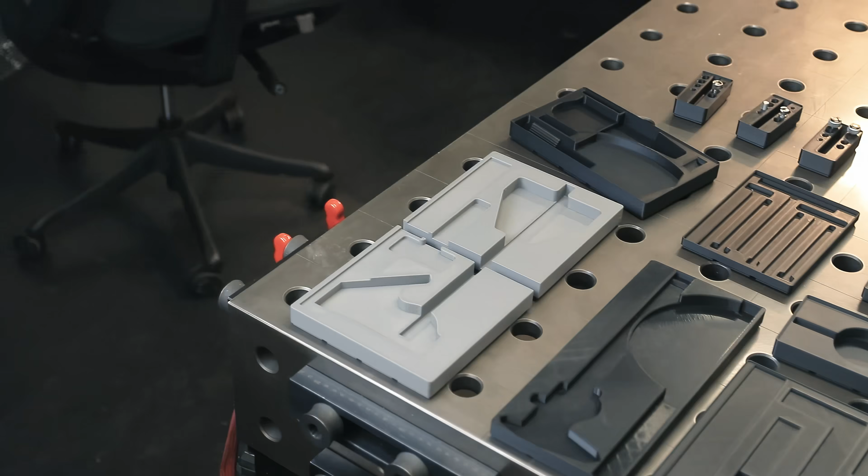Hey, welcome back. Today I'm going to show you how I organized my tool drawers by 3D printing tons of these organizers that are based on the Gridfinity system, so let's jump right in.

This might be surprising to a lot of you, but my favorite object in this entire workshop isn't a tool or machine, it's this tool cabinet. This thing is all steel and weighs over 300 kilograms empty, and it's made by a company called Lista, who make about the highest quality functional furniture out there.

Normally these things cost an absolute fortune, but some years ago I got incredibly lucky and was able to score this used for a really good price, and being used really makes no difference because these things will last you a lifetime. I love the layout of this because it has these gigantic flat drawers that are perfect for storing a huge amount of tools while wasting as little space as possible.

So almost all of my smaller tools live in this cabinet. The drawers on this are rated to carry up to 120 kilograms each, which is insane, and that's why a lot of places also use these to store materials.

You can get a ton of accessories for these cabinets to organize the stuff within them, and for a lot of things I'm using those, but the topic of this video is custom storage, so let's get to the point. One thing that the storage solutions that come with these cabinets don't work well for is my measuring drawer.

I've got a lot of stuff in here that doesn't really fit into any ready-made compartments, and while it looks somewhat organized, nothing really has a fixed place, and the bigger issue is that when closing the drawers, things tend to slide around and bump into each other, which is something you want to avoid with measuring tools like these. So I figured I'd take some time to come up with a solution for this.

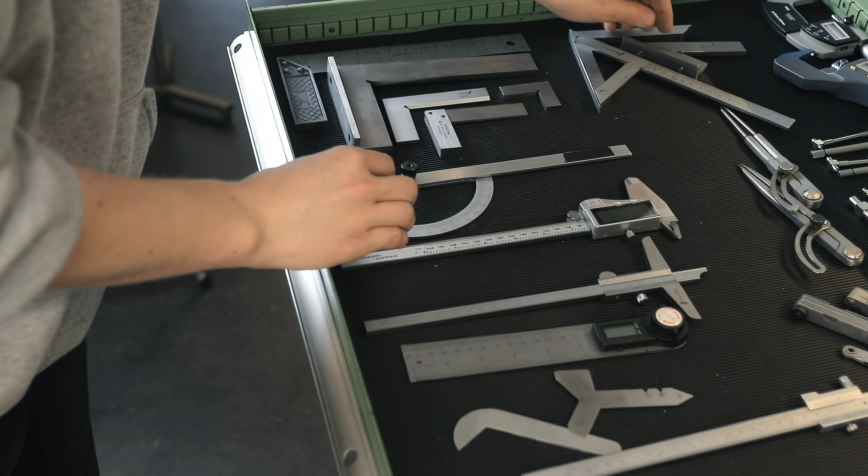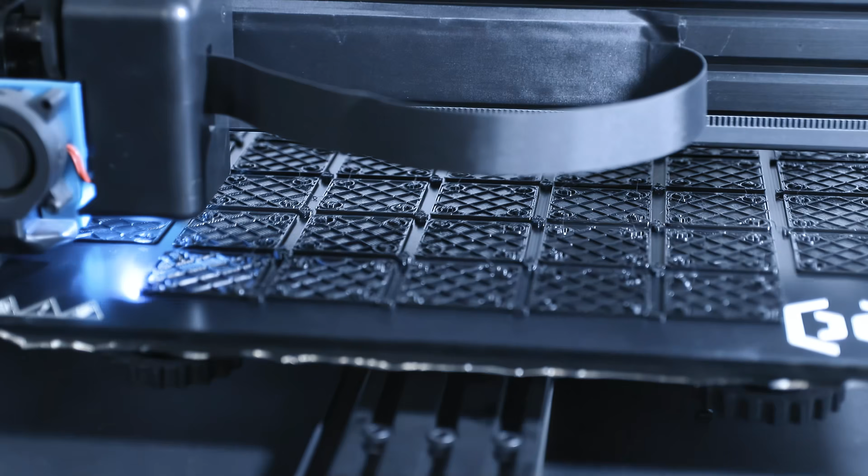If you watched my recent videos, you know I've been playing around with Gridfinity a lot, which is perfect for this application. Gridfinity is basically just an open source framework for making organizing systems, all based around a grid system that you can print yourself and then either use existing models, like these basic bins here that fit into the system, or make your own custom ones, which is what we're going to do today.

While we're at it, another drawer I want to tackle is the top one, which mostly contains a big socket set and various other bits and adapters. Storing this inside the case it came in works okay.

I'm not a big fan of these blow molded cases. They work okay if you're actually moving around with your tools, but since this always stays in the same place, plucking these tools out of their molds and putting them back in is pretty inconvenient, and this thing is also not very space efficient, so I want to fix that by making custom organizers for this one as well.

So next I'm going to show you the process of how I actually designed and made all these things, and show you some different workflows.

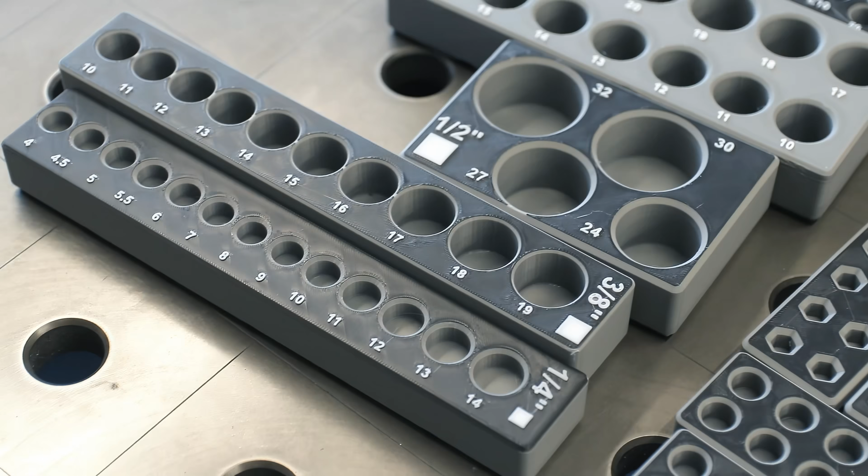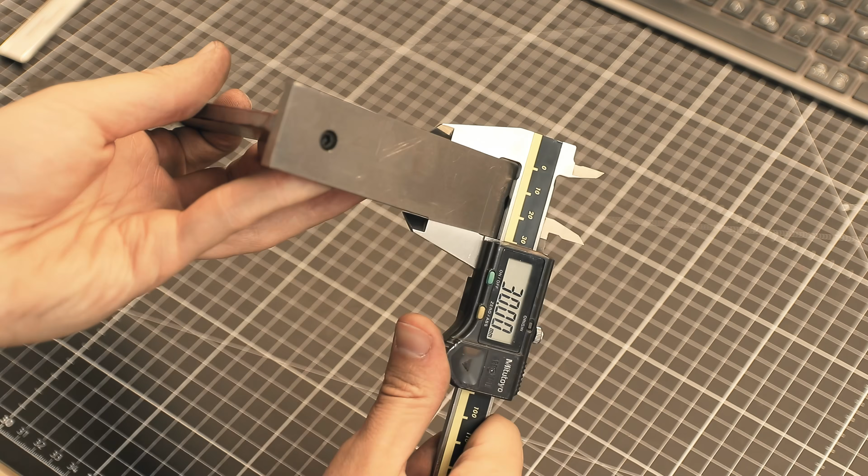There's different ways of how you can model the molds, and it depends a little bit on the shape of the tool, so I'm going to start with a fairly basic one like this square here. For something like this, the easiest way is to just measure the basic dimensions and write them down. Since this is a very simple geometric shape, this should be easy to build in CAD even for a beginner.

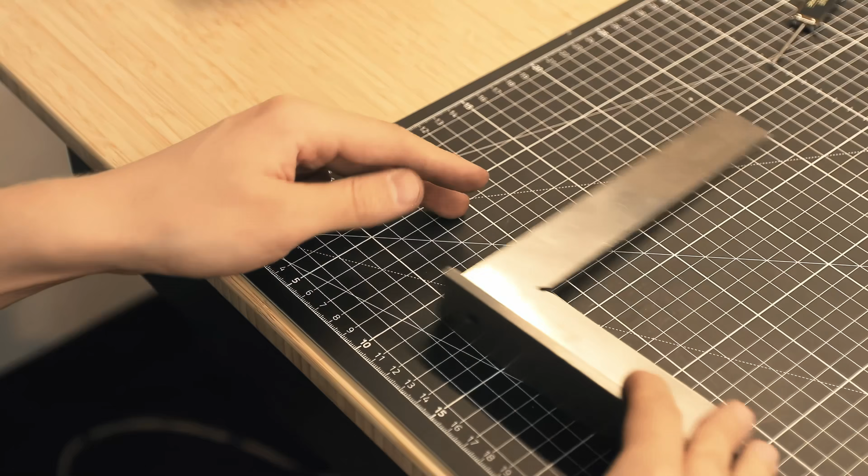Once you know the overall size of the object, it's now time to translate that into a Gridfinity grid. In this case, the object is about 205 by 130 millimeters long, so all you're going to do is divide the length and width by 42, which is the standard grid size, and then round up that number. For example, the length comes out to 4.88 grid units, so we can round that up to 5. Doing the same with the width, we now know that the container for this needs to be at least 4 by 5 units.

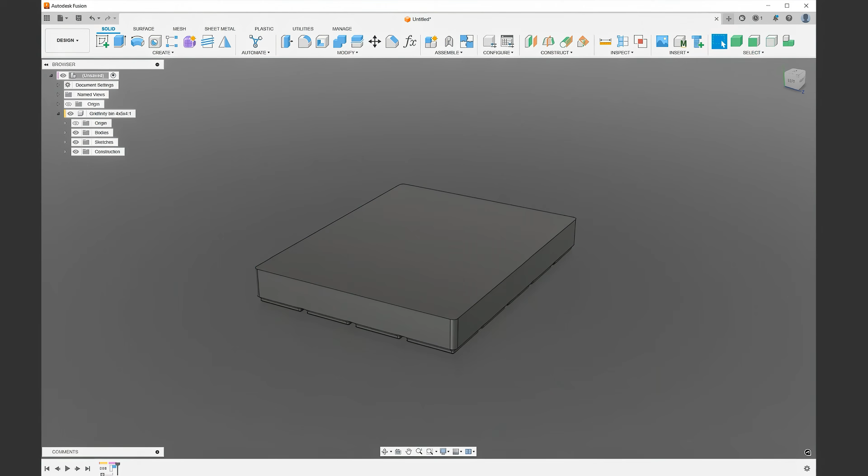So next let's jump into CAD to actually create that container. I'm using Autodesk Fusion, but you can generally create these assets in pretty much any CAD software. Fusion just happens to be the most convenient right now because people have already created some tools to make this as easy as possible.

One option is using the template from Zack, which you can find under his Gridfinity introduction video that I'm going to link in the description. This is basically just a Fusion file that contains a dummy Gridfinity box and grid, and it has variables set up that you can change to make it any size you want.

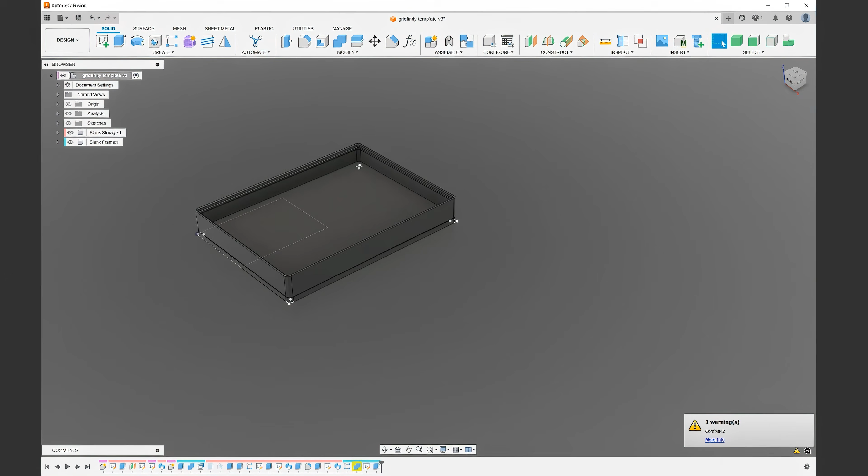That being said, if you want to make more specific changes to the model, you'd have to go into the timeline to deactivate or change some features. But there's an even easier way of doing this, using the Gridfinity generator plugin you can find on the Autodesk App Store. You can download this plugin for free, and it's super easy to install into Fusion. Once you've done that, you'll find a new button that lets you open up this menu.

This allows you to not only create a blank Gridfinity block any size you want, but there are also tons of additional settings, and you can even use this to make bins with custom divisions already built into them.

In this case, all we really need to do is set up how many units we need in the XY direction, and then the height of the box. The height units are multiples of 7, and I always make these boxes just tall enough to fit the tools, to save filament - so this depends on how thick the tools are. As for the other options, I usually pick solid since we're going to extrude our shapes into the block. I also usually deactivate the holes on the bottom and the lip that lets you stack bins on top of each other, since that's not needed here.

So now that we have our blank box, I create a sketch on the top surface and start drawing the shapes according to what I just measured - really simple in this case since it's all just rectangles. Once that's done, I extrude these shapes into the blank as deep as I need them, and of course you want the objects to stick out a little bit, or add some holes, to make sure you're actually able to grab the object.

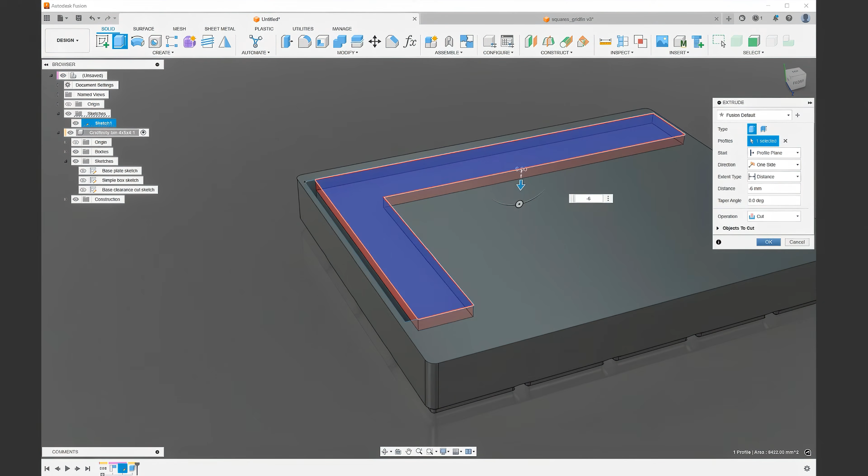Now, the fact that Gridfinity is based on a grid means these tool organizers are usually going to be rectangular, although it's possible to make other shapes, and I'll show an example of that later. But what that means for us right now is if we make an organizer that's 4x5 units and just put one tool in it, we'd be wasting a huge amount of space for nothing. So what I did was try to find combinations of tools that I can fit together in the same space to utilize the most of that area.

I usually tried to group similar tools together, but sometimes I ended up compromising on that idea to use the space most efficiently. With that, this simple organizer is already done and ready for printing.

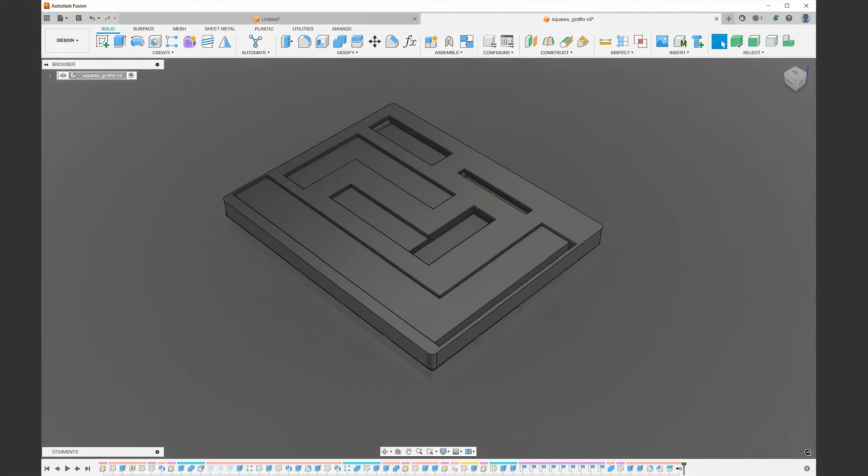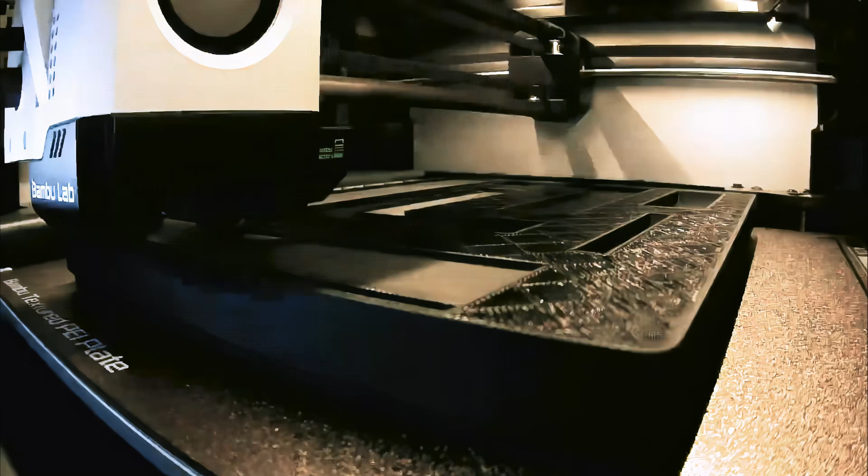There's only one thing to keep in mind, which is that you need to account for tolerances in your model. This depends on your printer, but generally you want to add around 0.5 millimeters to your outer dimensions to avoid the fit being too tight.

So here's the actual print now. Quality-wise, this came out great as always, but this was the first one I made, and I promptly messed up because I got some kind of measuring error in there, causing this shallow edge here to be too far down. But it's a very minor mistake, so I didn't feel like it was worth reprinting the whole thing, and luckily everything else fits very nicely. But it goes to show that you really want to triple check all your measurements before you start printing something like this.

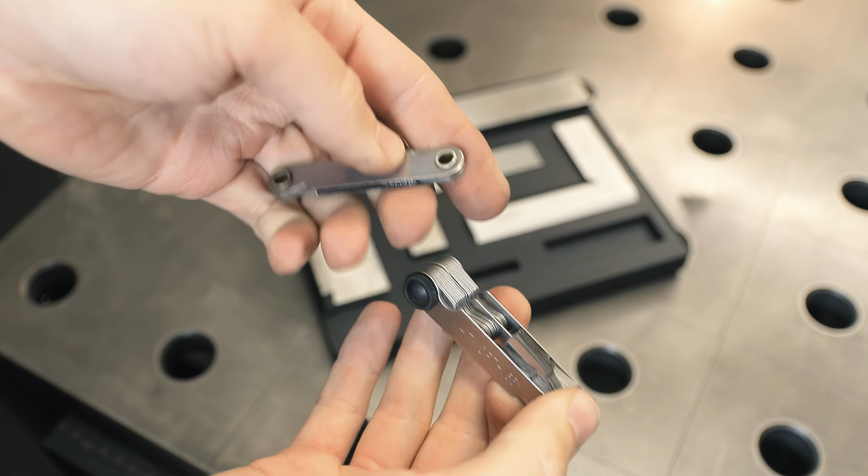As for the other two openings, I still had some space left, so I figured I'd use that for these threading gauges. I used the same approach you just saw for most of the tools that have simple shapes, so now let's see what we can do about slightly more complex shapes.

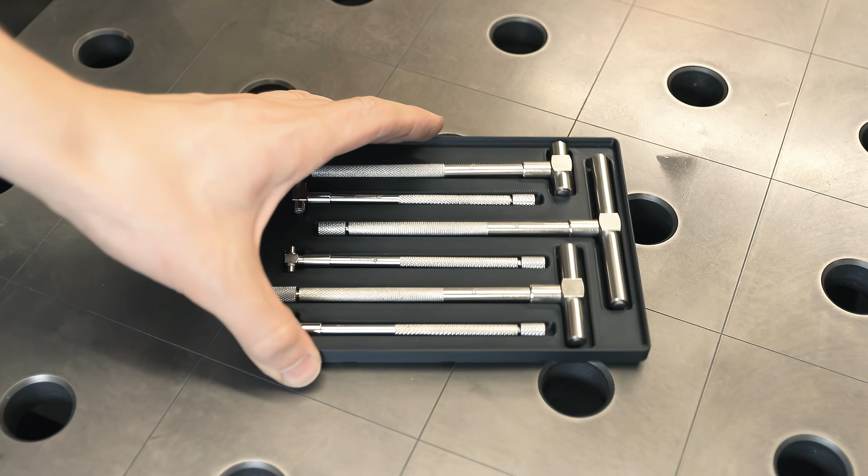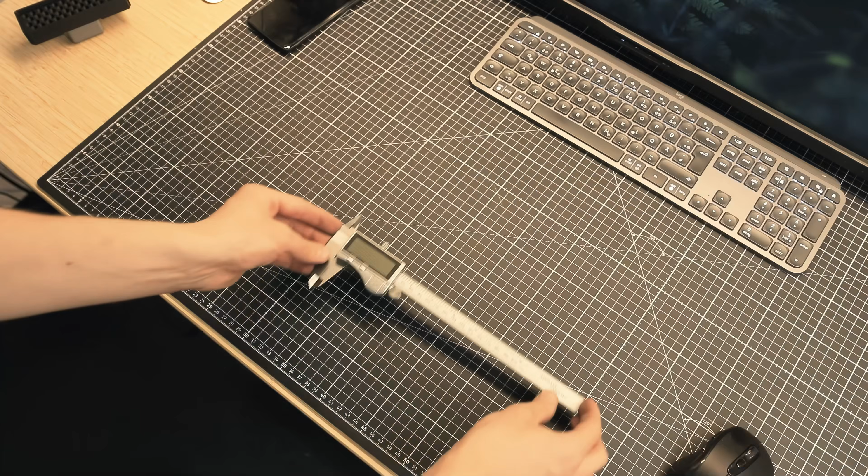For that I'm placing this on my cutting mat, which is very useful for this kind of thing, as you'll see in a second. I've lined up the straight edge on the tool with the grid on the mat, and now I'm going to take a reference picture of it.

You want to make sure you take the picture from straight above and right over the center of the object to minimize any perspective distortion. On most phone camera apps, when you hold the phone like this, you get a little dot in the center, which is basically a water level. The dot goes yellow once the phone is perfectly level, and that's when you want to take the picture.

Now I can load this image into Fusion using the canvas function, and I'm going to show you two reasons why it's incredibly useful to have the grid in there. First, I can use the grid to rotate my reference picture if necessary, so that the lines match up with the digital grid, and I can also use it to get the scaling right.

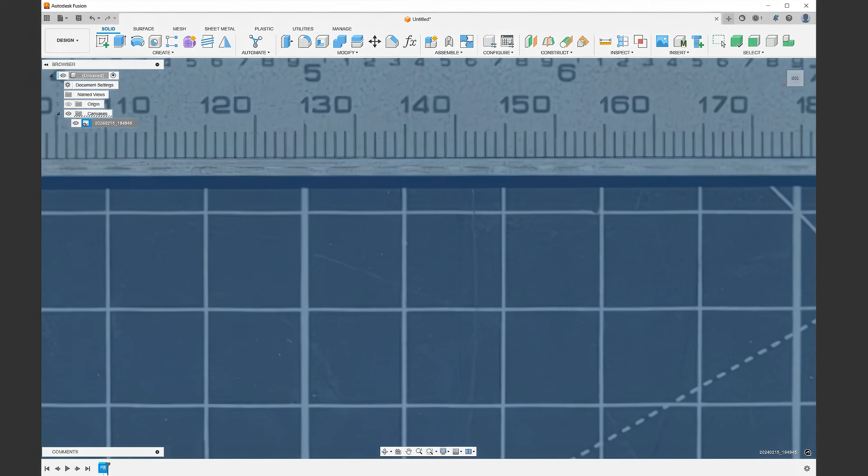Fusion has a feature for this called Calibrate, and when you click this, it lets you draw a reference line that it's then going to use to scale the canvas so it matches the scale of the virtual space. Since I know the lines on this grid use a 10mm spacing, I look for a place where the lines have the least distortion, towards the center of the image, and draw a line exactly 5 squares long, telling Fusion that this is 50mm. It's now going to scale my canvas accordingly.

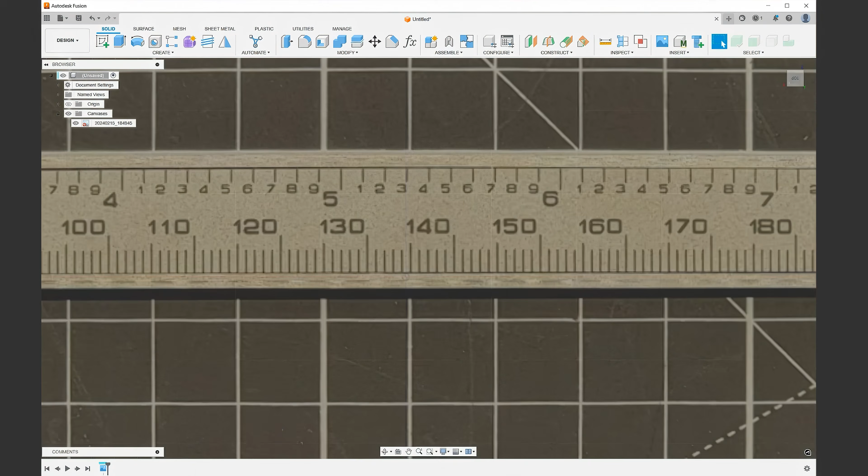Now that the reference image is scaled and rotated perfectly, I can use this as a template to draw a sketch outline around the object and then extrude that into my blank box.

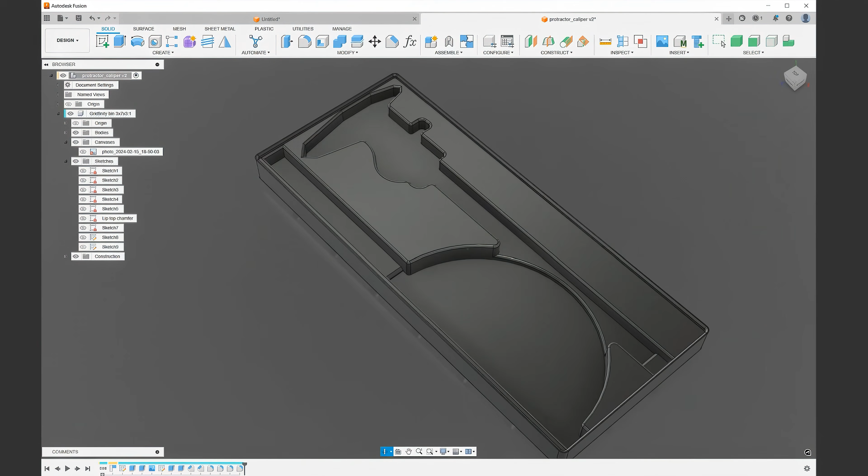When I started using this method, I was always a little paranoid about the prints ending up way too tight, so I added way too much tolerance around the shapes, which as it turns out isn't actually necessary. Over time I figured out that if you take a really good picture and adjust the canvas carefully, this method is surprisingly accurate, and I could have added way less tolerance, but then again it's not a big deal for this to float in there a little bit.

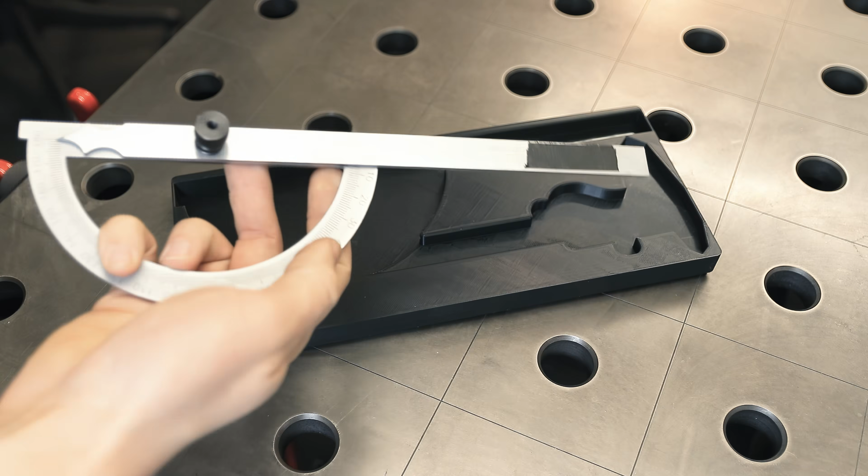If you're wondering what the other space in the box is for, it's for this protractor, which happened to fit together with the calipers quite well after adding a little bit of overlap. As you probably guessed, I modeled the shape for that one by hand because it's really just a circle and a rectangle, so no need for a reference picture for this one.

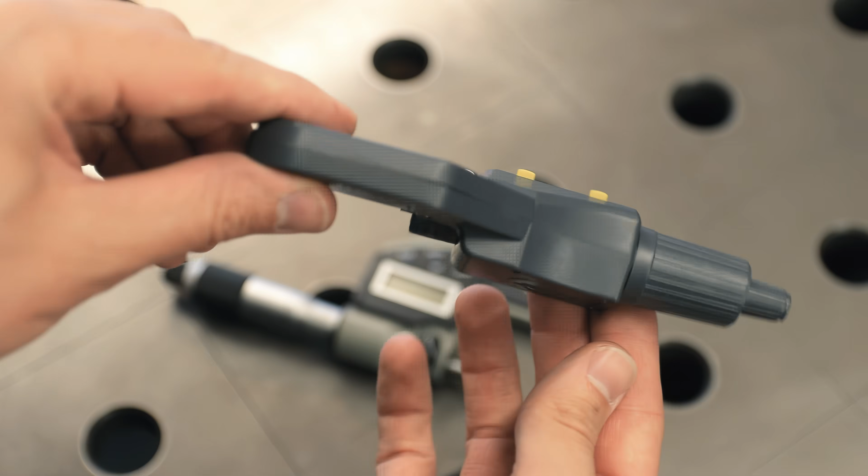So next, let's step it up a little bit and check out something even more complex, which is these digital micrometers. Again, modeling these by measuring every detail would take way too long for what I'm trying to achieve here. So I once again took a reference picture and drew the outlines, and while the objects before were pretty flat, these also have a more complex shape in the vertical direction.

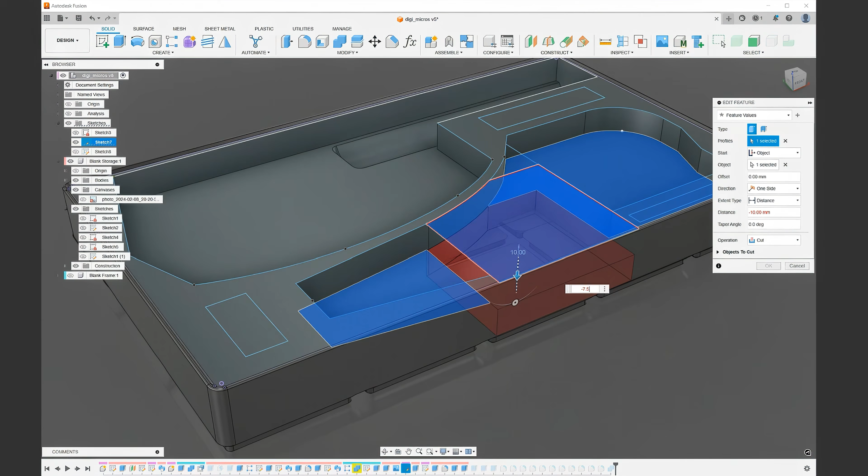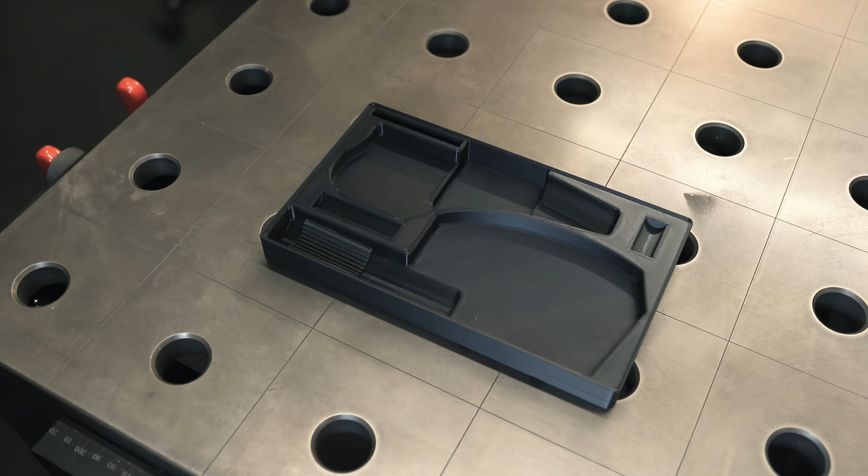Instead of recreating the exact shape, I mostly just looked at the difference in thickness between different surfaces on the bottom of these and measured the knobs in the back to extrude some cylinders, approximating where the molds would need some clearance so the objects don't wobble. Again, I added way too much tolerance around the outside to prevent a misprint, and also had to add a little rubber strip here because the larger one wasn't balanced well.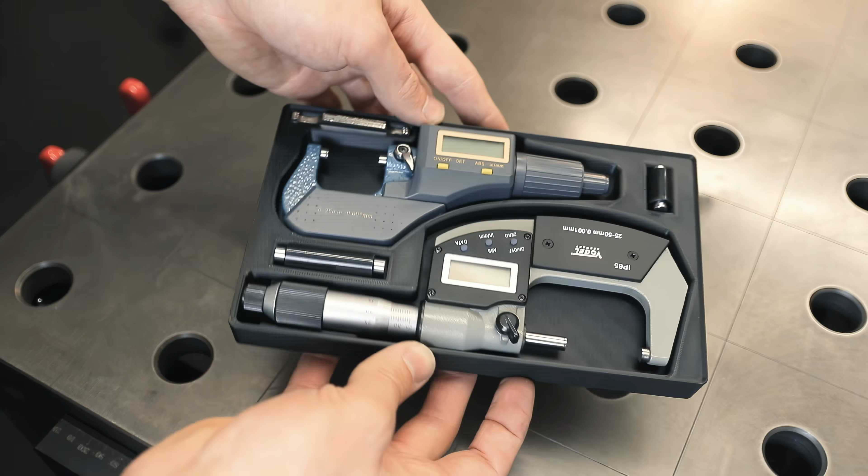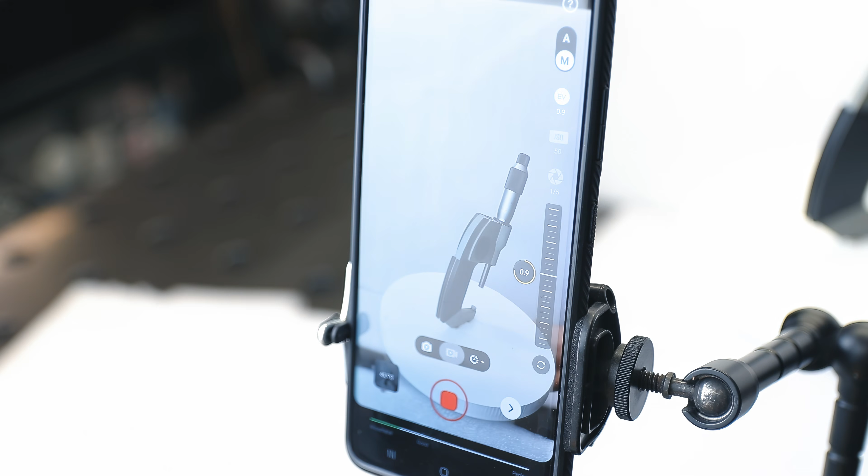So while this box works fine in general, it could use some improvement, which brings us to another method to approach this. There actually is a way to get a real-life object into a 3D application that doesn't involve any modeling, and that's called 3D scanning. There are multiple ways to scan objects, like photogrammetry, where you use pictures of an object to try and generate a model, but the best way is to use a dedicated device for this called a 3D scanner.

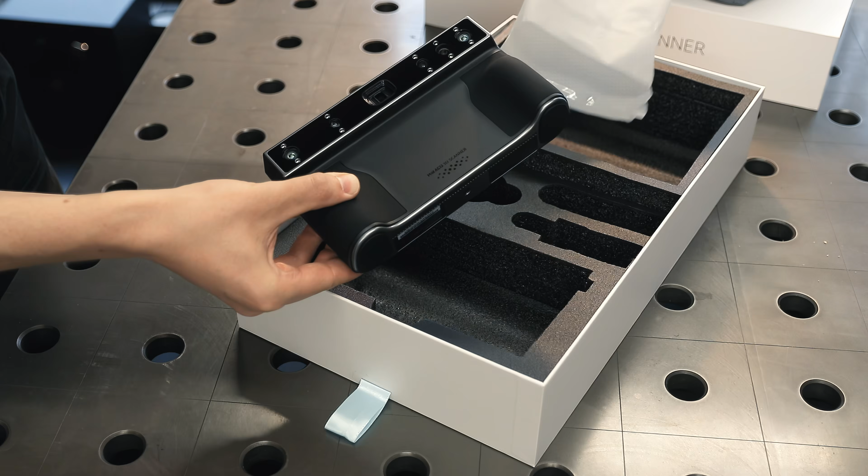Unlike other scanners which often work in conjunction with a smartphone, this is actually a completely independent device that has everything built into it to create scans from start to finish. It looks and feels a little bit like a DSLR camera, except that it doesn't have one big lens, but rather this whole array of sensors that's used to scan objects in real time. It also comes with a ton of accessories and feels like a really high quality device, which is backed up by some impressive technical specs.

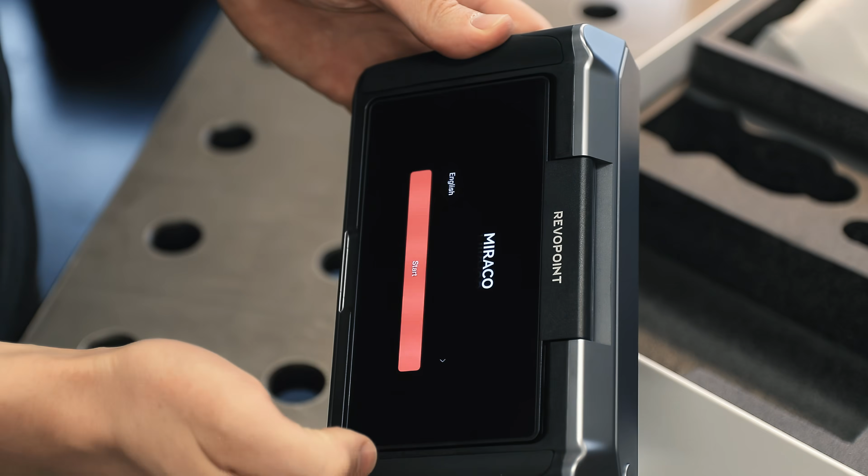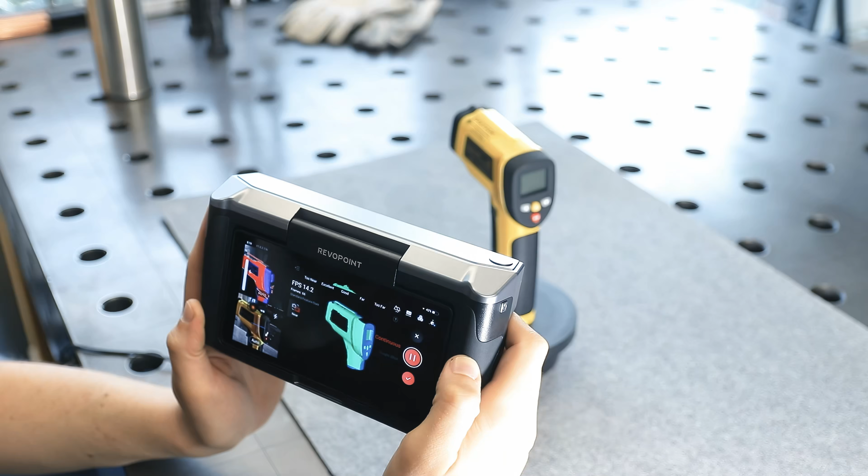After some setup, you can immediately start scanning stuff, and there's a few different ways to use this device. For small to medium sized objects, there is the classic way that lots of these scanners utilize, which is to put the object on this little turntable, which comes with the scanner. With this you can spin the object around while the scanner remains stationary and captures data from all sides. But with the Miraco you don't actually need that, because you can also move the scanner itself around the object while it captures data automatically.

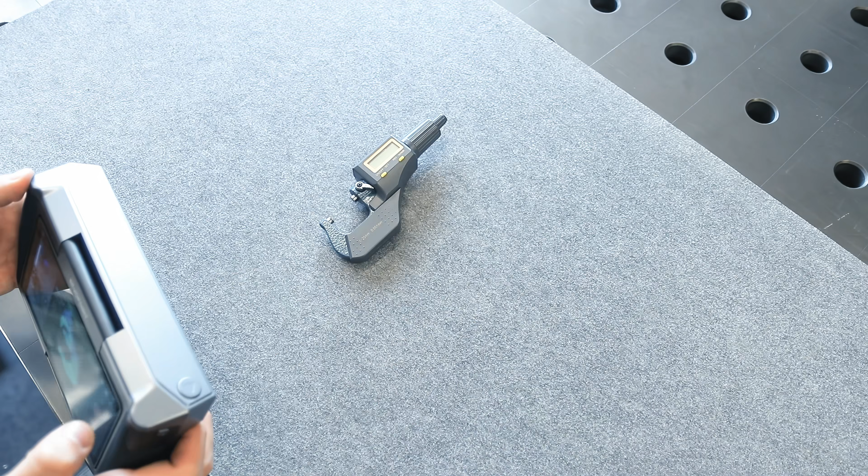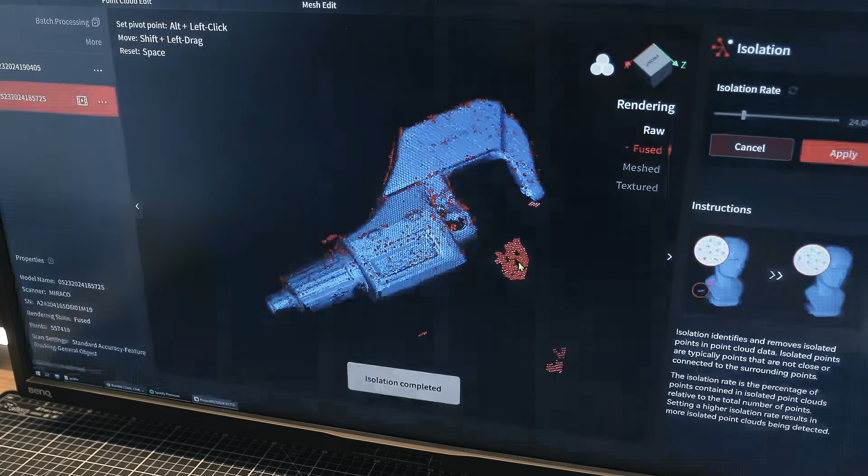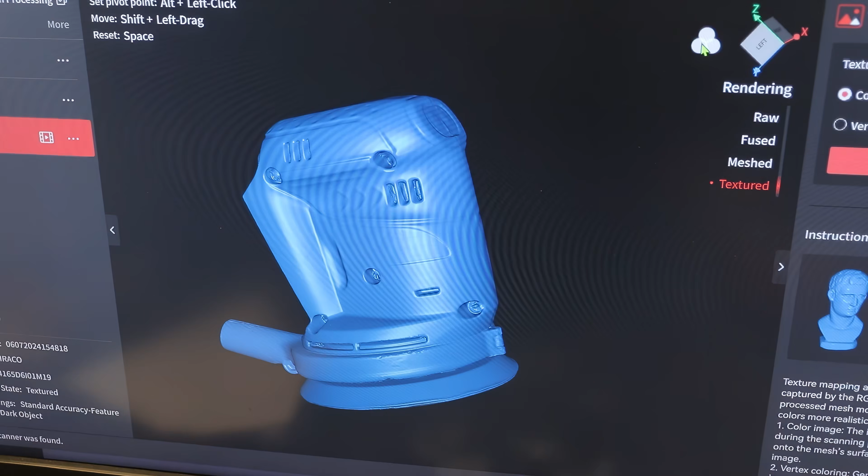Once you're done scanning, you can either process the models directly in the scanner, or you can put them onto a computer and use the software that comes with the scanner. This is used to refine and finalize the models, for example by deleting bits of the model you don't need. So I scanned my palm sander here just as a test, and in the model you can really see the high resolution you're able to capture with this, where even small surface details like those dimples on top are fully present.

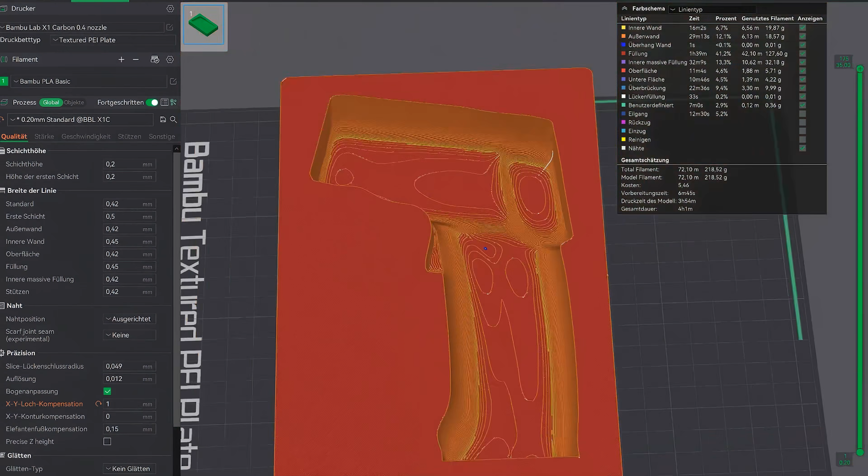And then I just hit print. The scans from the MIRACO are very accurate, with precision up to 0.02 millimeters, so it wasn't surprising that this fits in there perfectly, and I once again probably could have added less clearance if I wanted this to be even more form-fitting.

Overall I think this device is super useful for any kind of prototyping, and of course very powerful in conjunction with a 3D printer especially.

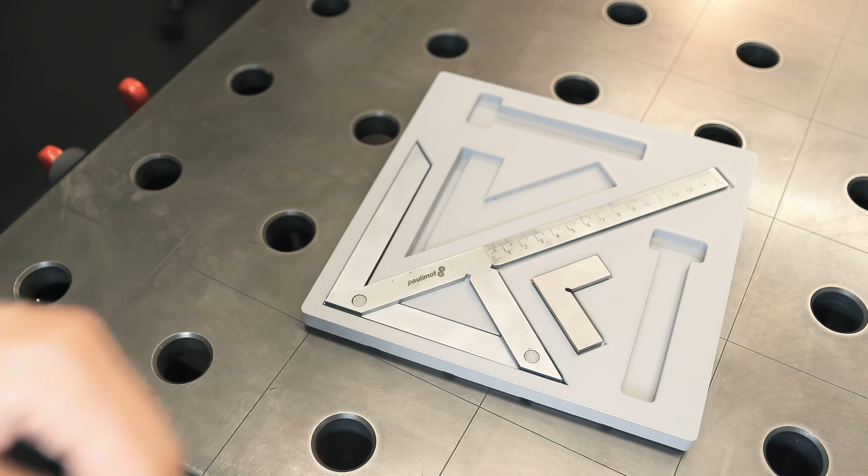Like I mentioned, I didn't get my hands on the scanner until after I was basically done with this project, which is why I made most of the organizers the old-fashioned way. So here's a few more of those, most of which are quite simple.

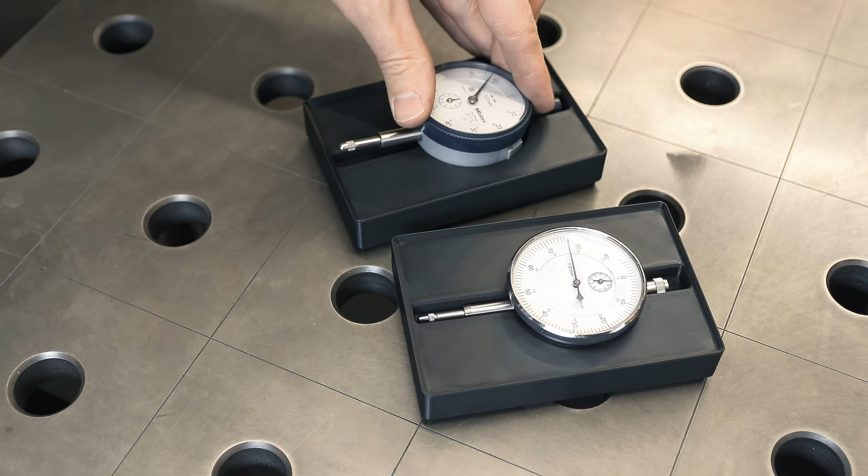I made these for some dial indicators, which unfortunately had to be pretty big at 2x6 units. But I also made these little 1x2 ones, which are perfect for the dial test indicators.

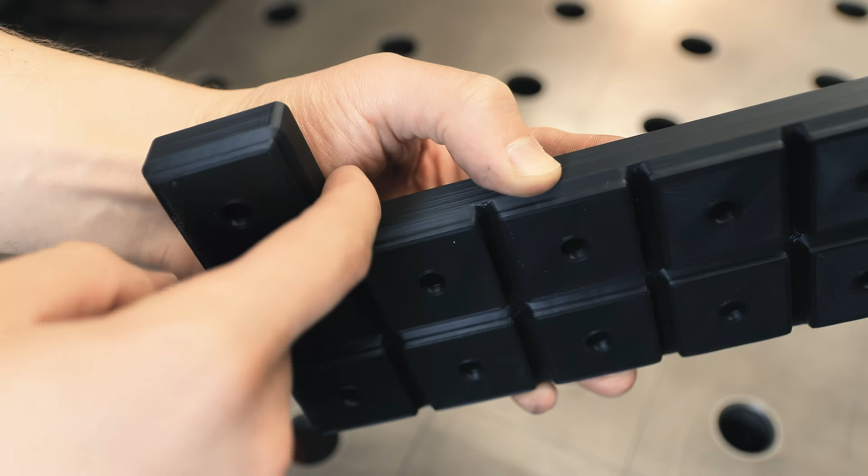Here's a bit of an odd one. This is L-shaped because I couldn't figure out a good use of the remaining space, and I'm pretty sure it's illegal to use Gridfinity like this, but it actually works out perfectly and happens to fit the boxes I showed you before on the side.

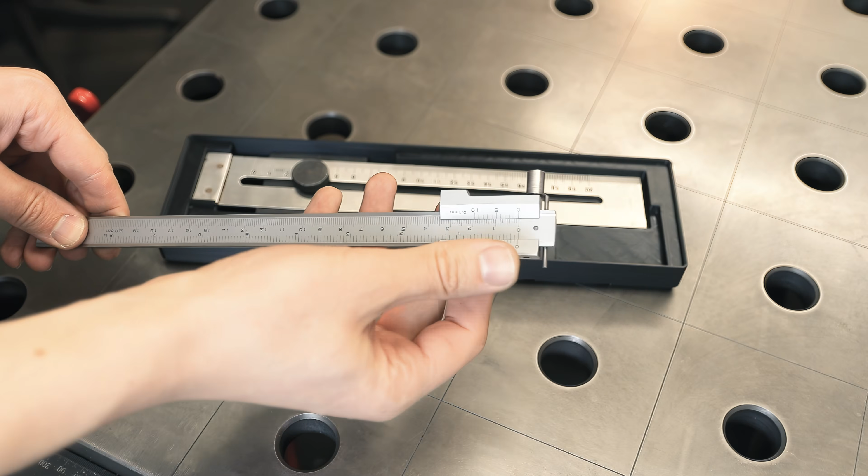Here's another one that has some slight vertical overlap that allowed me to squeeze these two tools into a 2x7 space. And so far with the overlapping ones, I've always managed to make them so that you can retrieve the tool on the bottom without removing the one on top.

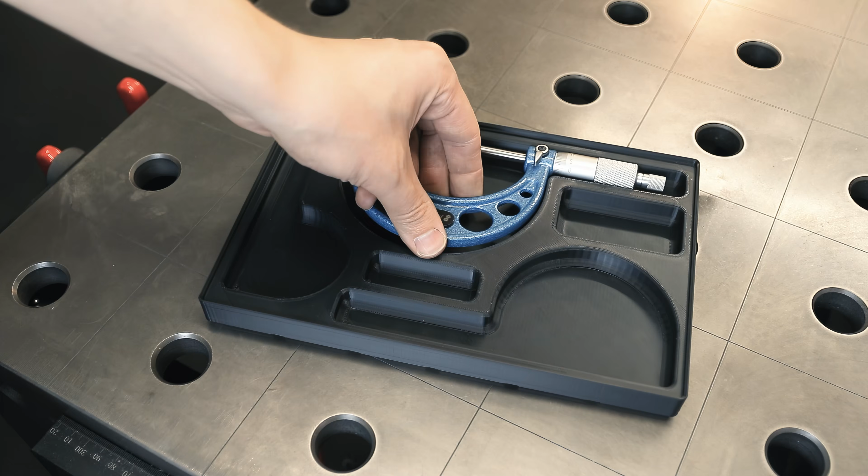Here's another big one for some micrometers. Again, I used the reference picture method to make this and added a bit too much clearance here. This is another case where I probably would have used the 3D scanner if I had it at the time, but this still works fine.

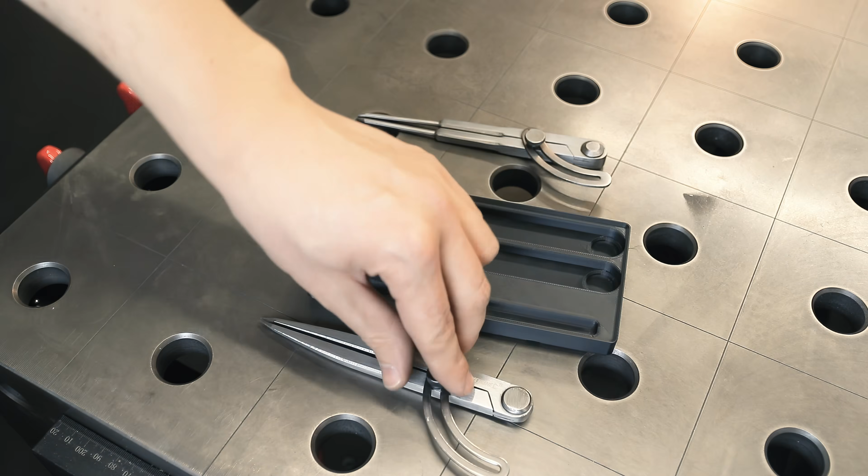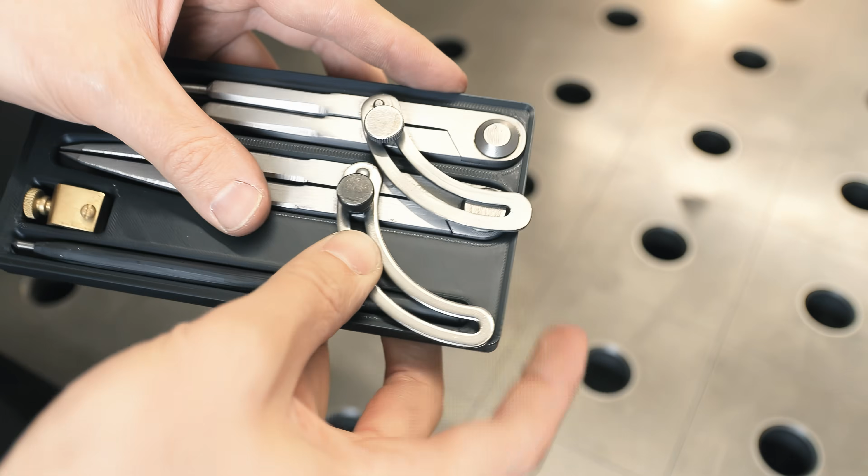With this one I've been cheating a bit because these things almost fit into a 4x2 space, and I was too stubborn to make it bigger. So they stick out the side very slightly, but it's not an issue as long as this sits next to a piece of the same height.

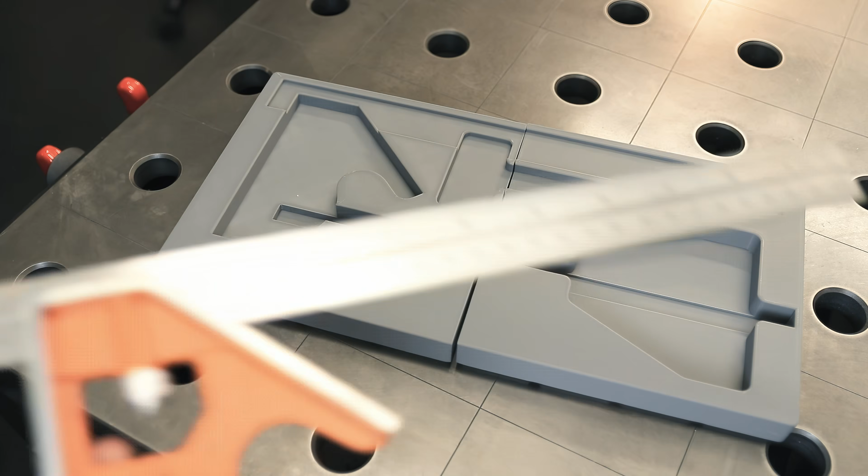Here's another odd one. This is the only organizer I couldn't fit even on my large printer in one piece. But since all of these will be aligned on the grid anyway, it's actually a perfectly valid solution to just split them up. So I printed this in two pieces to fit this large combination square and the depth gauge. And once it sits in the grid, this acts as if it was one piece. So you can store fairly large tools this way, even if you have a small printer.

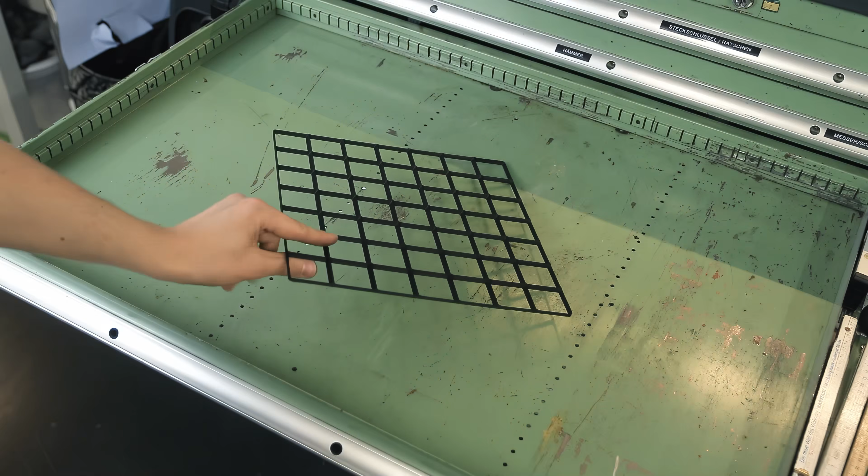With that, it's now finally time to put all this stuff into the drawers. So first I'm placing the grids, and then as always with Gridfinity, you can spend an endless amount of time playing Tetris with these and moving everything around to find the best layout. And this is what I ended up with for now.

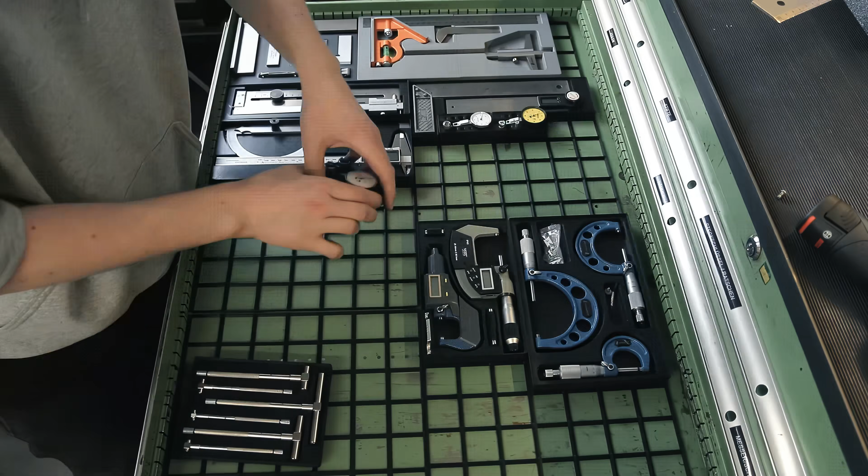Obviously this is a lot more tidy than before. Everything has its fixed place and nothing is able to slide around anymore. But what I was most surprised by is how much space this ended up saving, because I thought I might actually need more space in the end. But as you can see, there's still quite a bit of room if I want to add additional tools.

With that, let's now move on to the socket set, which I also printed a bunch of organizers for. Luckily with these, the process is a lot more straightforward, since all of this is basically just cylinders, so there's no need to take any pictures or scans.

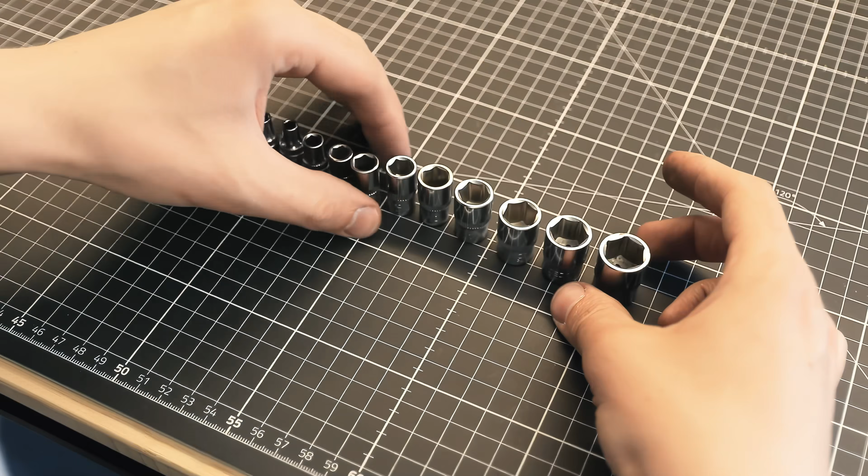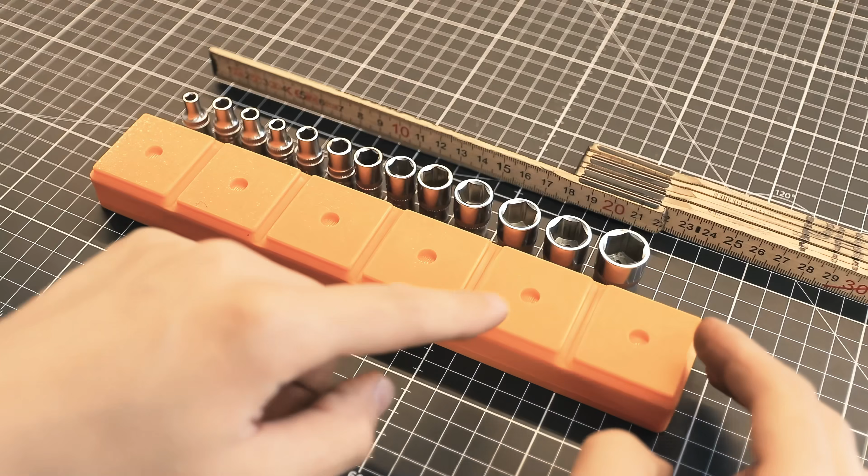I would just place a set of sockets on the grid and then figure out a good way to position them, which usually is just a straight line. And there's actually an even easier way to figure out how many grid units you need that doesn't involve any measuring, and that's to just use an existing Gridfinity print in case you have one. I got this basic bin here, for example, which tells me that fitting these into 6 units would be pretty cramped, but 7 seems to be a good spacing.

So I just created a 1x7 blank in Fusion, drew a circle and used the pattern function to create a row of those. And then it just comes down to measuring each socket and changing the diameter accordingly.

Once again, you do want to make sure to add enough tolerance. For this purpose I want these to be easy to retrieve, so I added about 0.3 of a millimeter to most of the holes, and that ended up giving me a fit where the sockets slide in and out of the holes pretty easy, but without having a lot of play.

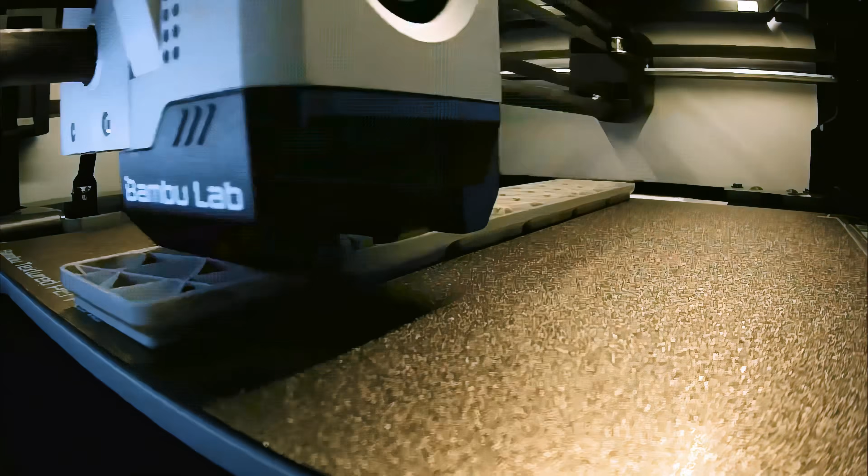I also added some lettering to this box, and I have the luxury of being able to print it with up to 4 colors on my X1 Carbon here, thanks to the AMS. So I made the letters white, and the reason this is gray on the bottom is just I happen to have a lot of cheap gray filament at the time. So I printed most of it in gray and then the top in black and white to improve the contrast.

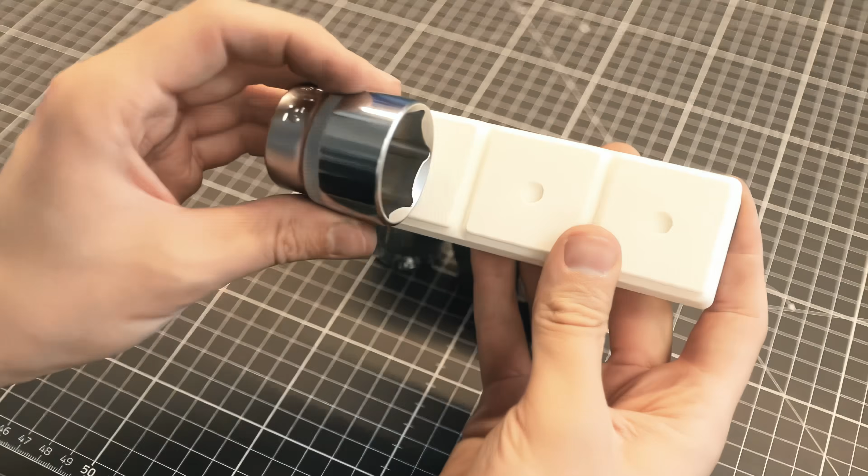All the other boxes work the same way. I just grabbed a bunch of sockets and played around with the layout a bit.

For the long sockets, I can't store them standing up because they won't fit in the drawers that way. So these are laying flat, but it's basically the same process, except you just extrude the cylinders sideways. And for these sockets that have significant tapers, I also added a little step so they don't wobble.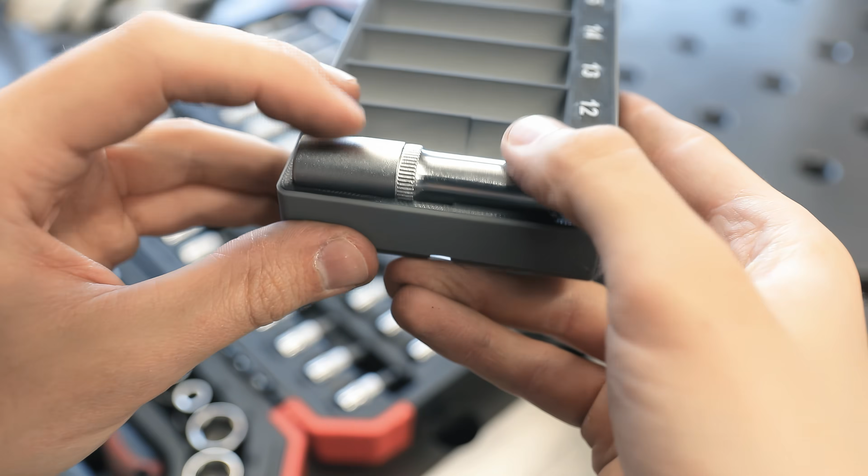The small bits here are even easier. These all have the same size, so I really just need to measure one. And then I made these 1x3 organizers that fit 12 of them each.

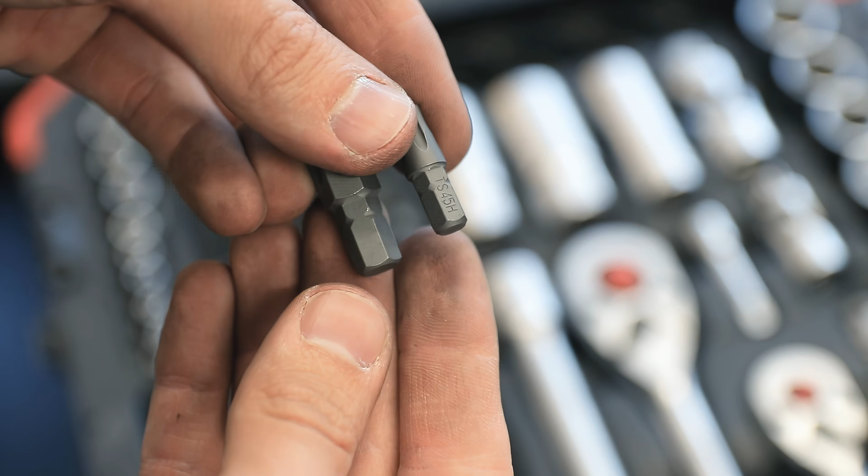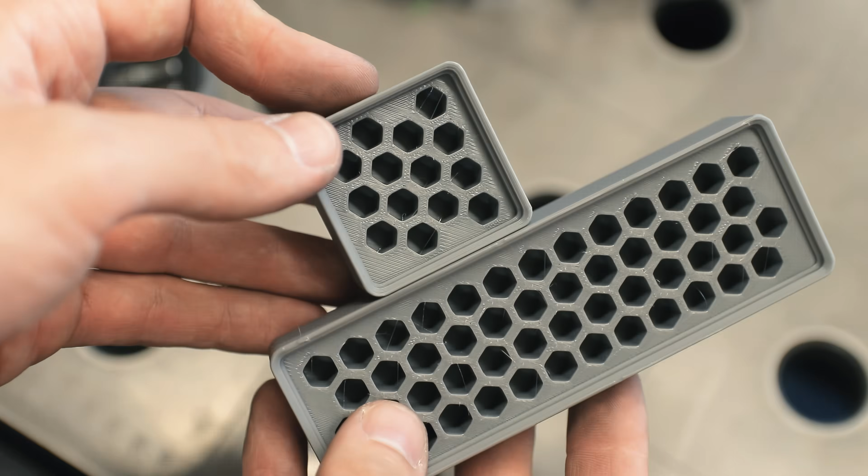Then we have these guys, which are a little bit bigger than normal screwdriver bits. So I just used the same box layout I just showed you, except with hexagonal holes. And for all the small bits, this is the only one where I got a bit lazy and used models I found online and modified them a bit, although I probably could have modeled them myself in the time it took me to find and download them.

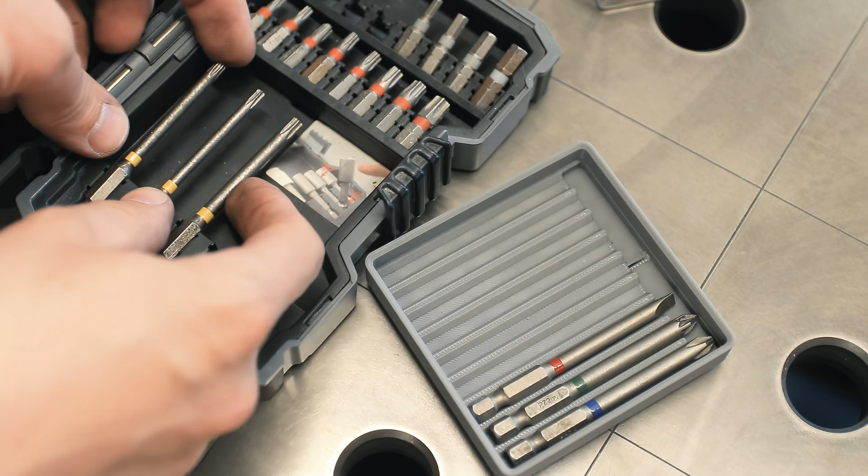I also downloaded this design for the longer bits, but I really can't recommend it. This is a pretty poor design because they tend to fall out super easily, but it's gonna do for now. This one for the long bits, on the other hand, works perfectly.

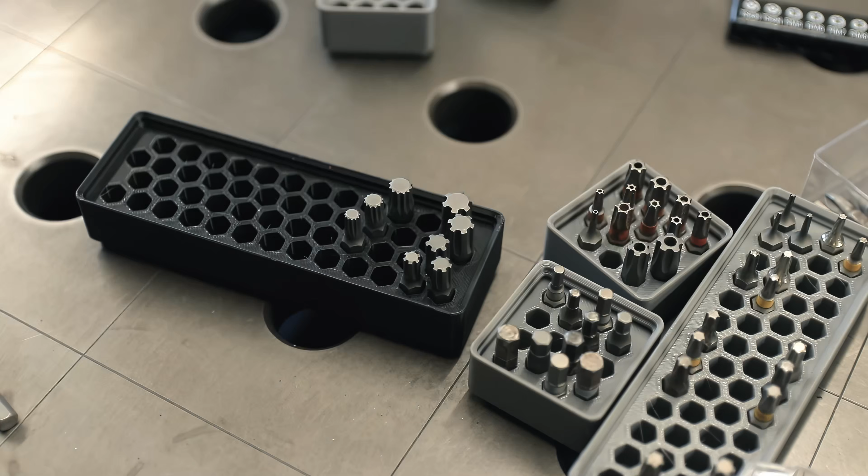Then it was time to sort all the bits into these containers. I generally suggest sticking with the 1x1 bins for most of this stuff, because those allow you to organize bits a bit better by making small groups, but the large ones work well for stuff like these various oddball security bits that I never use anyway.

Now it's time to finally empty that blow molded box the socket set came in, and yes, this was just as satisfying as it looks.

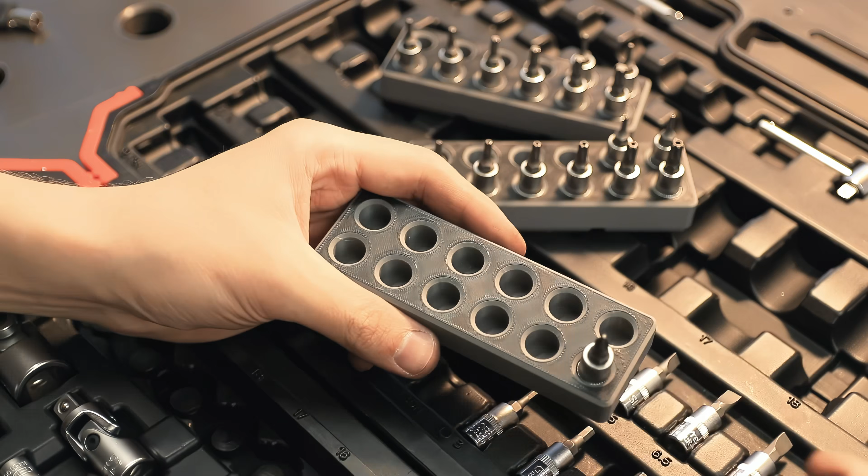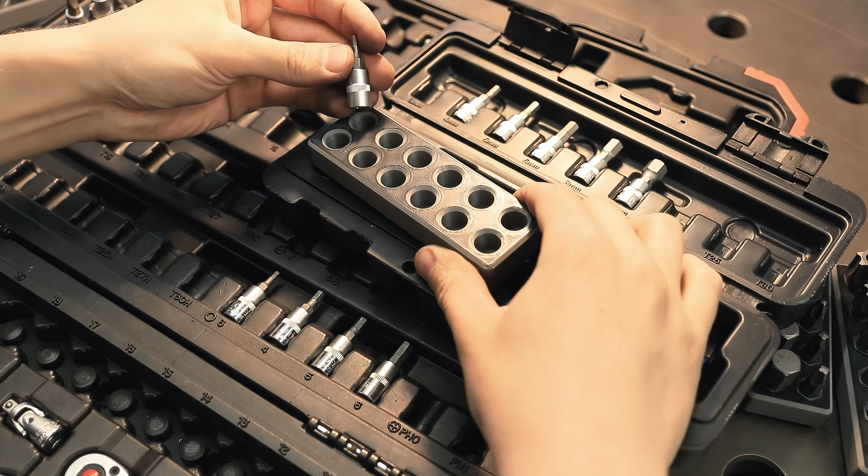One thing I really like about this whole custom organizer thing is that it lets me consolidate different tool sets into one cohesive system. So for example, I have a bunch of additional small sockets from another set here, and I can now combine all of these together and get rid of all the bulky cases.

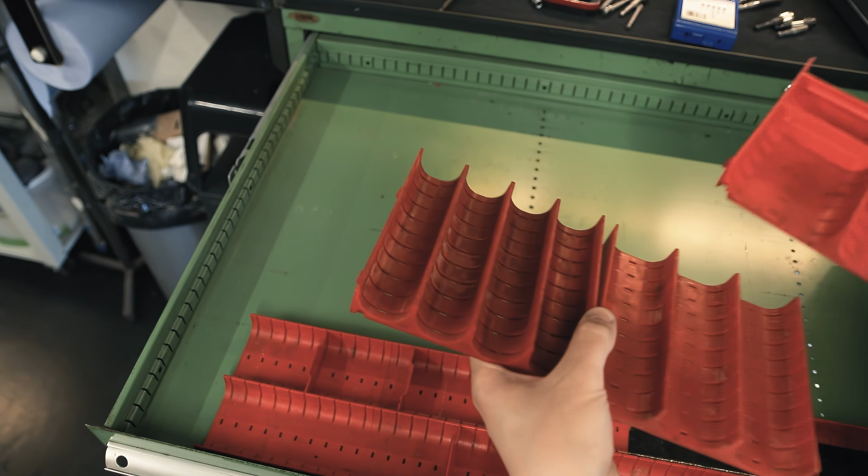I then emptied out the drawer again, and you're probably wondering why I didn't make any molds for the ratchets and other accessories. The reason is that, as I mentioned in the beginning, the Lista cabinets come with their own organizing system, which actually works perfectly for that kind of thing, so I'm going to use a combination of those methods. The system is based on these cylindrical trays, which really are kind of genius.

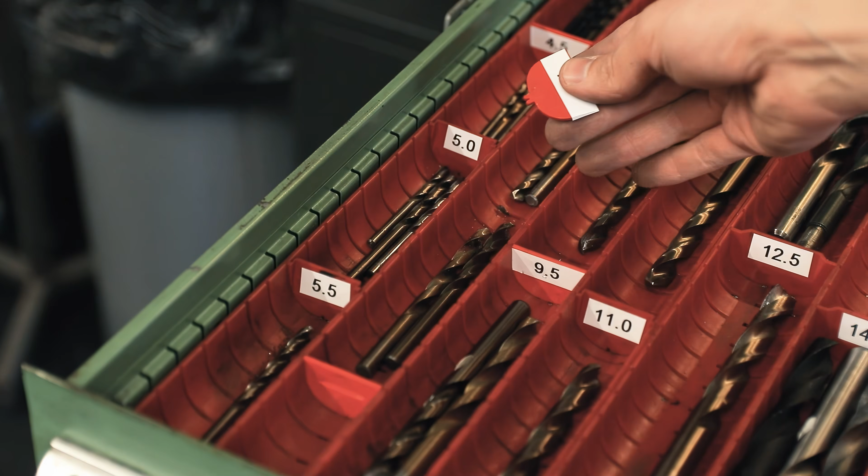They come in different sizes and can be attached together to create rows as long as you want, and then you can add dividers to create individual compartments. So it's a very flexible system, which is absolutely perfect for storing stuff like drills, or anything where you might want to change the layout frequently.

Just like Gridfinity, this system is super satisfying to use because it feels a little bit like playing with Legos. So I think these two are a great combination, and I probably don't need to mention you could also 3D print a similar system, but I'm pretty sure it would end up being more expensive than just buying them from Lista.

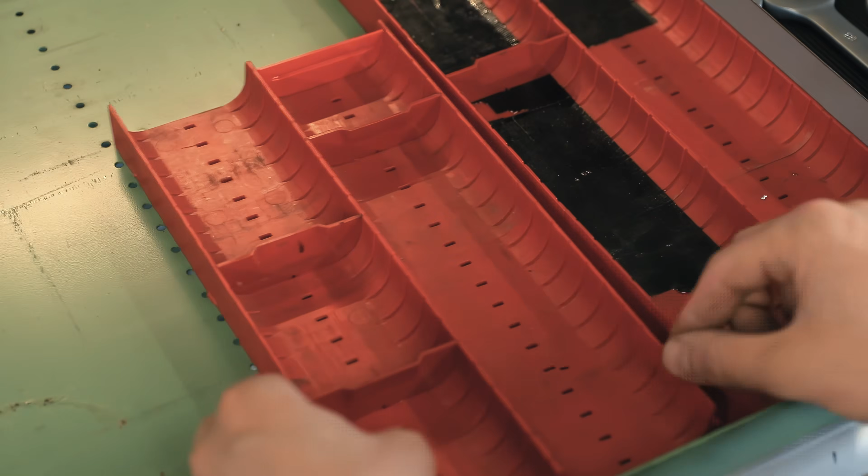The cool thing about this solution is that it's very adaptable for different sized objects. So I can now consolidate all my different socket wrenches, ratchets and extensions in one place. And there's also plenty of space for stuff like random sockets, all kinds of adapters, and anything that doesn't need to be in a labeled compartment.

For example, I now have all the quarter-inch adapters from different sets in the same place, which makes a lot more sense than pulling them from 3 different cases.

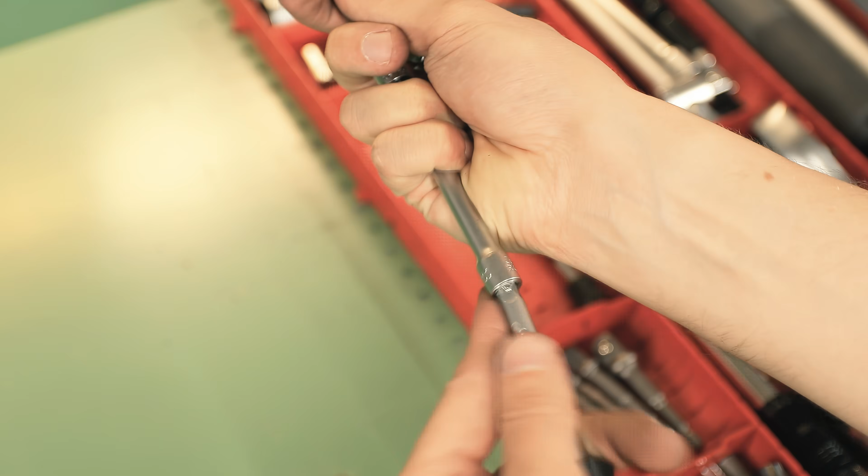Now it's finally time to finish this by placing the printed organizers in here as well. And once again I'm playing around with the layout, which most likely isn't final yet.

Once again, I was really surprised by the sheer amount of space this saved compared to the original box, but what's even better is that it's so much quicker and more comfortable to retrieve tools from here, because you can now just grab stuff and put it back without any resistance, and the clear labeling also really helps.

Another cool thing is that I can now grab a whole bunch of sockets all at once and bring them to the workbench, which I think is gonna save me a lot of walking around, because I never bothered hauling around the entire case the way it was set up before.

I think I'm done with this organizing madness, at least for now, because as satisfying as it is, I can't deny that it does take a lot of time, but I also know this kind of thing really pays off for years once you've done it, so I'd say it was definitely worth it.